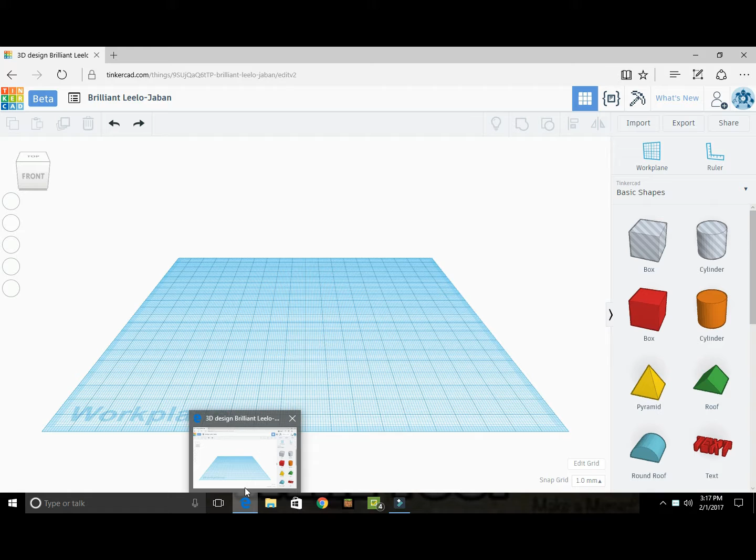It's our introduction tutorial, so to speak. Alright, so right here you have your work plane. This is where you do all your building. You can move things off of this work plane while you're not working on them and save it. Here changes the view, you'll see it move. Look, there's bottom, top, left, and right. Here, down here, is your millimeter grid size.

I do 1.0 millimeter grid size. You can go up to 5 millimeters, or you can go down to 0.1 millimeters. That is more for your shapes than anything else. As you can see, we have 2 here, and the biggest increment you can do is 5 millimeters. I choose to stick with 1.

There you go. We'll show you the ruler. This helps me keep things in line. What you do is, if you want to straighten it with a corner, you take the circle and bring it right to that corner. You'll see it line up with the other lines. It makes life easier when you're trying to make proper measurements. I have noticed freeforming it sometimes doesn't always work.

Now we have shapes. Scroll down and you'll see the different shapes, everything from cubes. You can also do text. See different silly shapes. These up here, the gray things, are called holes. We'll work with that a little bit today, and you'll see what that is. But let's work with a solid cube. See, text again. Cylinder, holes again. I just want to make you familiar with what we have to use right now.

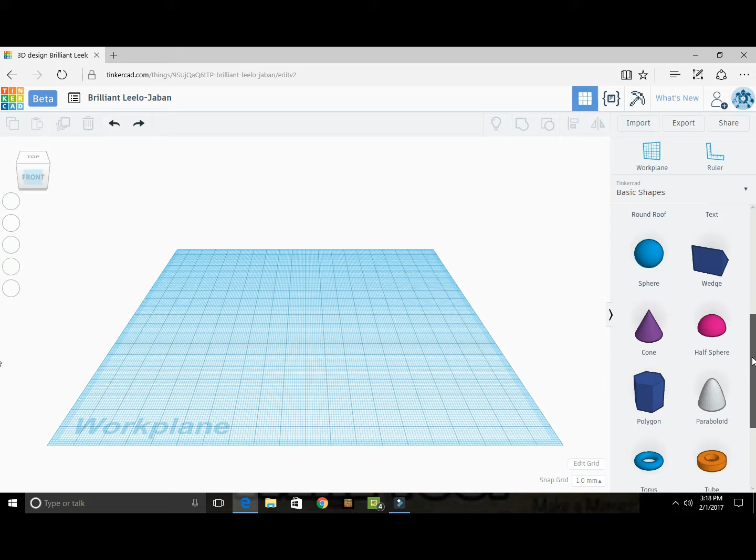This is nothing fancy, this is just straightforward. We'll move it down again and go through a little bit more. We have a half circle. This is a wedge, which is actually really nice for brackets. There's a hexagon, there's a little almost washer shape, which technically you could just make your own anyway with 2 cylinders, but why bother when it's already there? A rounded cone, and I don't even know what that little donut shaped thingy is.

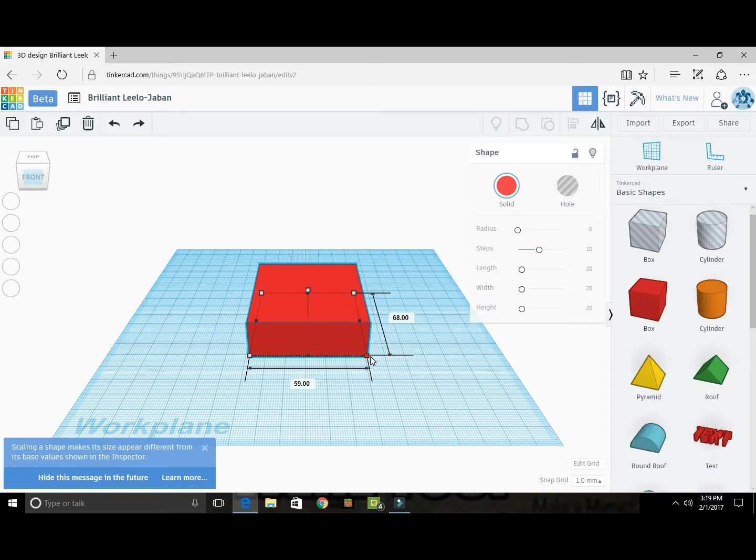Alright, let's work with a cube. Here you go, you have a cube. To make it bigger, I grab this corner right where my mouse is and I pull it out like so. See? This makes it bigger. That lifts it off the plane, but I'm not doing that. This button right here makes your box taller. Also, these other ones do exactly the same as this corner. As you can see, it raises it.

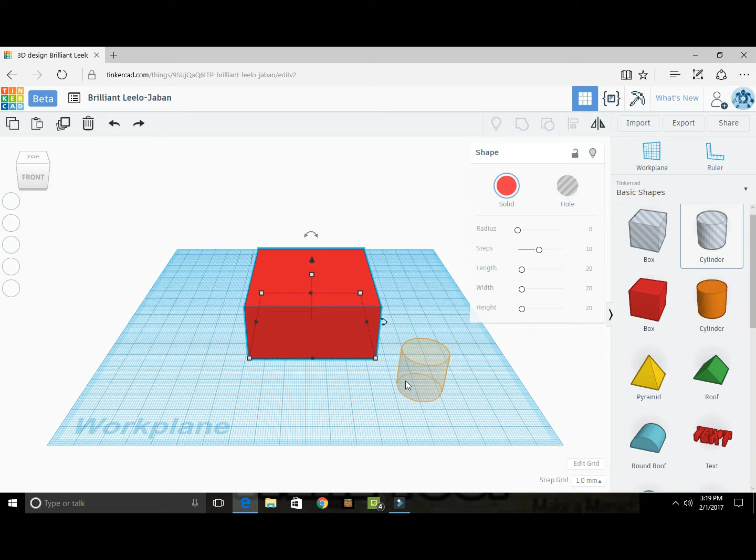This is a solid. Now we're going to make a hole. I normally just take the normal shape once I figure out which shape I want to make the hole in. Oh, actually this time I'm going straight for the hole. Wow, that's surprising, normally I just take the cylinder and turn it into a hole. Alright, so I made it a little bit taller than the original. Now I'm aligning it - this one aligns it off the board, I do not want to do that. So I'm going to align it, then I'm going to group it. And then see, you see right through.

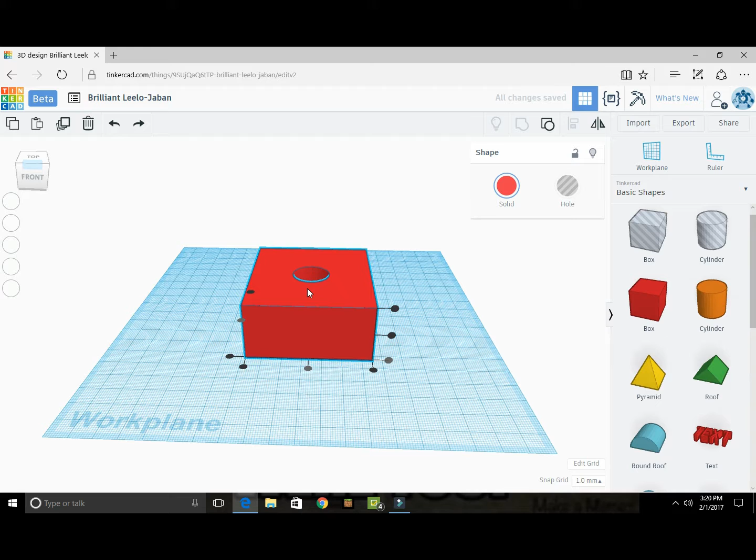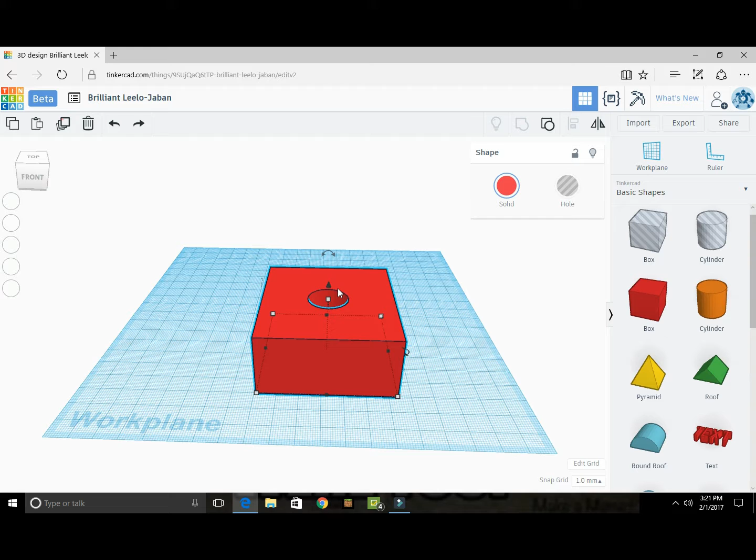Now we're going to try to duplicate it. I had a little bit of an issue there, I think it was just glitchy because it was my computer. For some odd reason, I could not figure out why it would not duplicate hitting the duplicate button, which is right next to the little trash can. I hit it a few times and still did nothing. See, right here, I moved it, so maybe it was just not enough space again, and it would just move back. I selected it again, nothing, and again nothing. Like I said, I think it was a little glitchy. So what I did was I copied and pasted it, and then I duplicated it and it worked.

So now what we want to do is we want to finish up. To finish up, we are going to export - that little button right there, click it. My computer's running a little slow. There we go, so this will get it onto your computer.

I like to do everything in the design. This also saves it, so if I need to log off and I need to do something, it's all saved. Then you can do the STL file, the OBJ, or SVG. This also does SVG for laser cutting, for 2D. We're going to hit

STL eventually. Like I said, computer's been a little glitchy today. I'm going through the different ones right now. The SVG you can also do for - I used it for Cricut designing. It was actually much easier to use than Cricut itself.

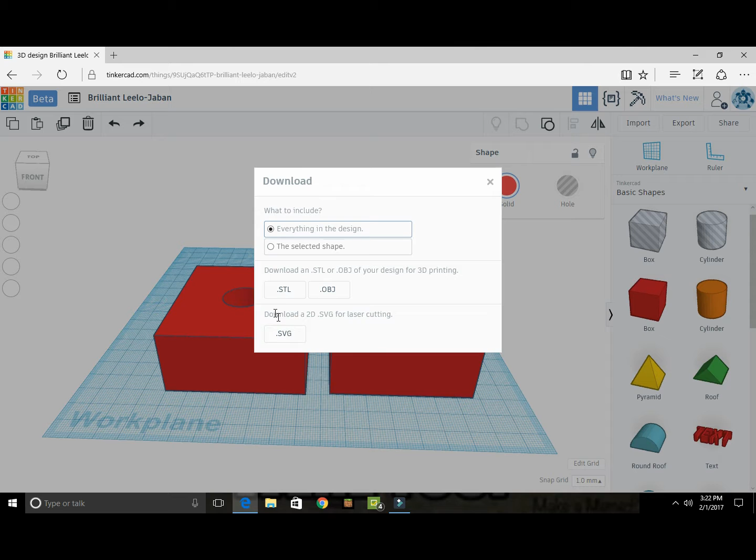Okay, so we are not going to close out. Gonna hit the STL. There we go, hit the STL. I'm in Edge, so it's going to save it here. A little pop-up is going to come along at the bottom, right where my mouse is. Takes a couple seconds for my computer. There we go, you're going to hit save. I hit cancel because I don't need more blocks, I've got plenty.

Just like so. And that, ladies and gentlemen, is how you use Tinkercad.